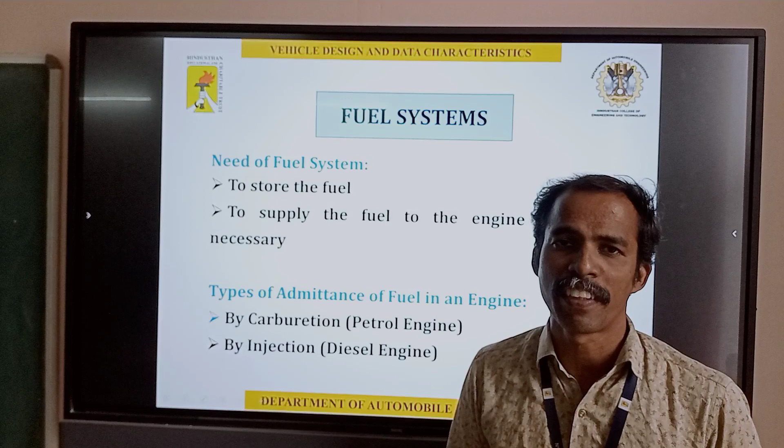The fuel system is used to supply fuel to the engine in the correct manner, at the correct time, with the correct quality. If it fails, overall engine performance will be affected and emission norms will also be affected. So the fuel system must give a correct quantity of fuel at all conditions, because we run the engine under various conditions - accelerating, decelerating, braking, and halting at a traffic signal. In these various conditions, the fuel system should supply fuel to the engine with the required quantity and quality.

So, types of fuel system - we admit fuel inside the engine by two processes. In case of SI engine, the carburetor is used to mix air and fuel and supply the same to the engine. But in case of CI engine, we inject the fuel at high injection pressure.

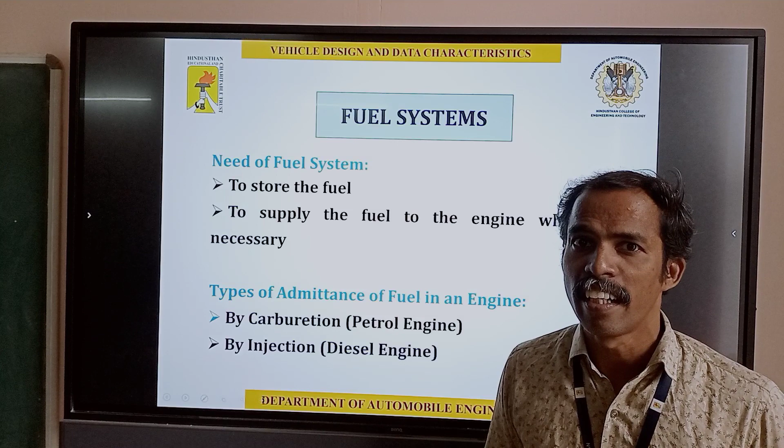Next is the fuel pump, present in both SI and CI engines. The purpose of the fuel pump is to send fuel to other devices like the carburetor or the injection pump with a minimum amount of fuel pressure, since fuel is set with a higher injection pressure. The pump pressurizes the minimum amount needed to move fuel from a lower level to a higher level, such as to the carburetor or for fuel injection.

The carburetor is a device used to mix both air and fuel in various quantities. The exact quantity is called the stoichiometric ratio - that is, 14.7 kg of air is needed to mix with the fuel to burn exactly, without emission, for clean combustion. So the carburetor mixes the air and fuel well and sends it to the engine.

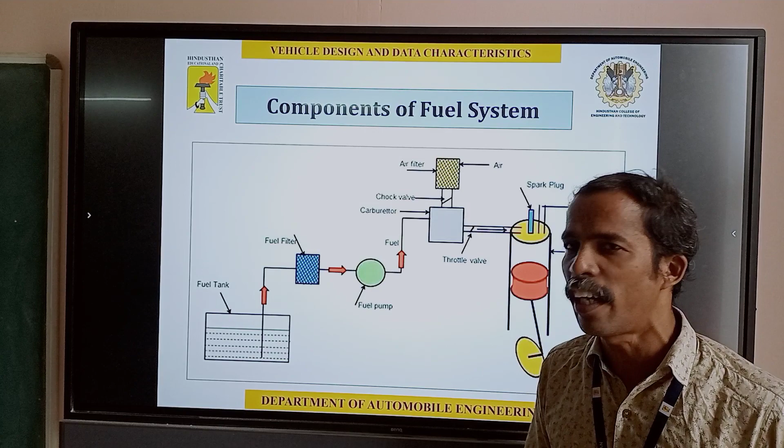Similarly, just as we have a fuel filter, we also have an air filter. The air filter filters the air and sends clean air to the carburetor. Then, finally, the engine burns the air-fuel mixture and develops power.

We have three kinds of mixture proportions. The first is the chemically correct ratio, or stoichiometric ratio - meaning the entire quantity of fuel should be burned without any balance, giving high power output. This ratio means 14.7 kg of air is needed to burn 1 kg of fuel completely, giving clean emission. This is called the stoichiometric ratio.

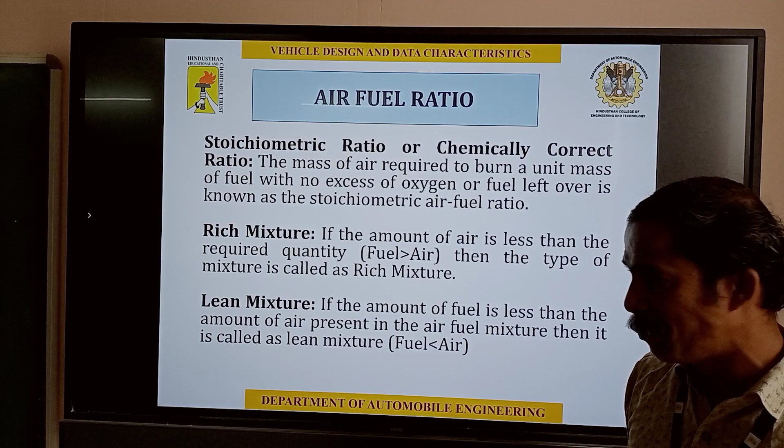The next one is the rich mixture. If the required fuel quantity is more than the stoichiometric amount, the mixture is called a rich mixture. The last one is the lean mixture - if the quantity of fuel present in the air-fuel mixture is less than required, the mixture is called a lean mixture.

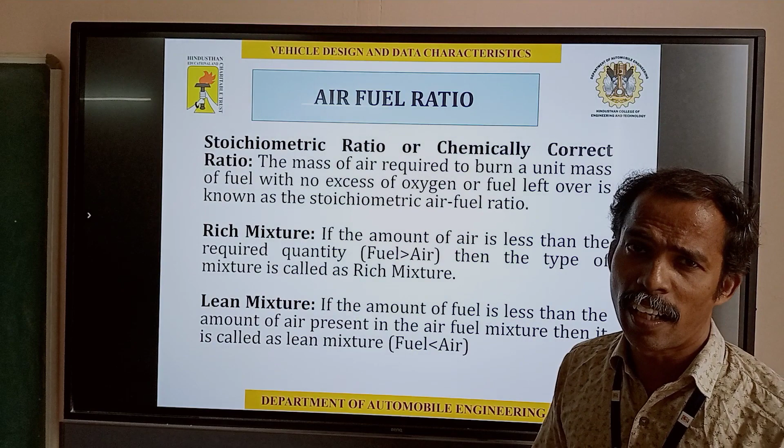For a rich mixture, the fuel amount is more, so higher output is possible, but at the end of emission, some fuel may remain as unburnt gases. In case of a lean mixture, which is used for normal acceleration to give normal power output, the emission may contain oxygen, but at the same time, the entire fuel present in the air-fuel mixture will be completely burned.

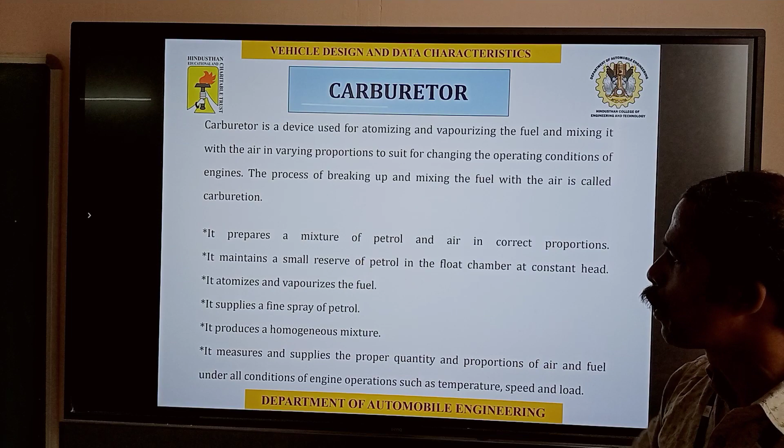These are the purposes of the carburetor, which we have already seen. The carburetor is used to supply air-fuel mixture with respect to cylinder requisition. It prepares the air-fuel mixture, atomizes and vaporizes the fuel, supplies a fine spray of fuel, and produces a homogeneous mixture - meaning air and fuel are thoroughly mixed well.

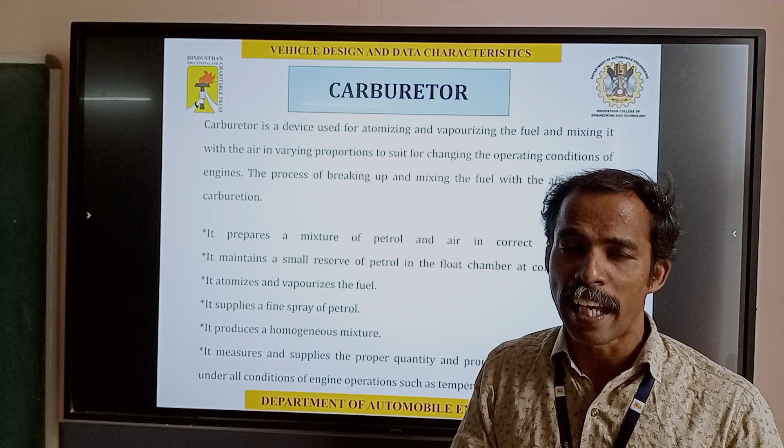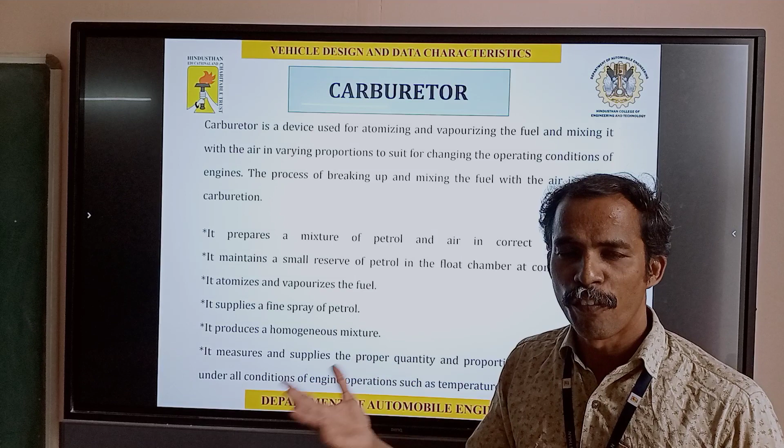In a CI engine, the mixture is called a heterogeneous mixture, because in the entire pool of air present in the CI engine's combustion chamber, fuel is sprayed at particular places - some places have more fuel, some have minimum fuel. So that mixture is called heterogeneous. These are the purposes of having a carburetor as a device.

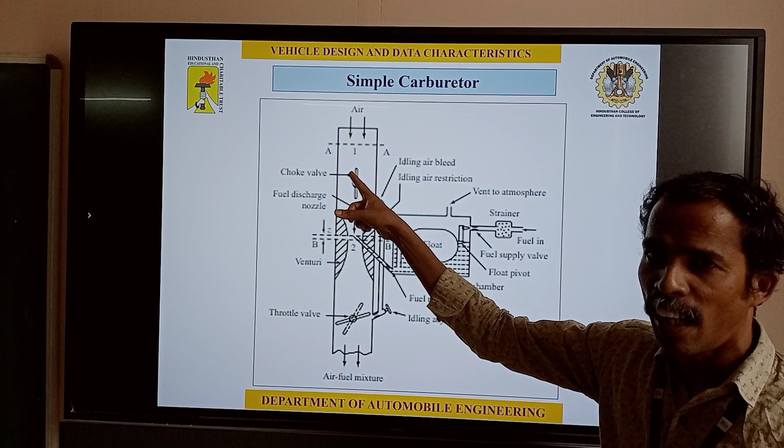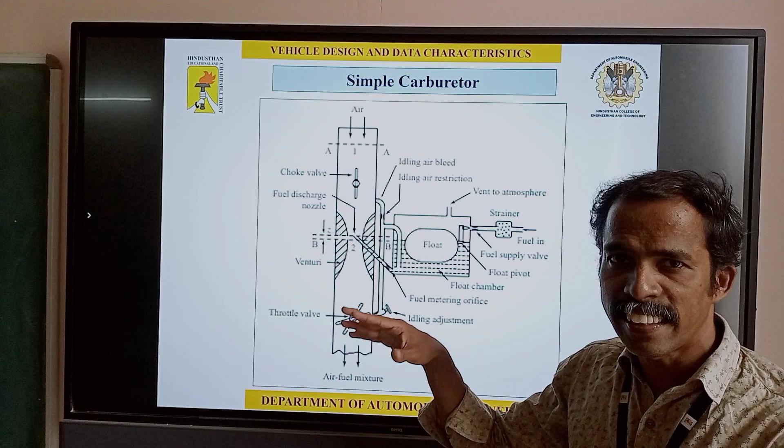This figure shows a simple carburetor used in a vehicle. The upper portion is called the choke, and the lower portion is called the throttle valve. The throttle valve is connected to the accelerator, so when we accelerate the vehicle, the throttle valve opens and connects the entire engine vacuum to the carburetor, allowing it to suck in the maximum amount of air.

Choke valve we are using for the purpose of starting. We are not admitting the air to go into the carburetor at the time of starting the engine. Once the engine is started, the suction created by the engine automatically opens the choke valve and more amount of air can pass through the carburetor.

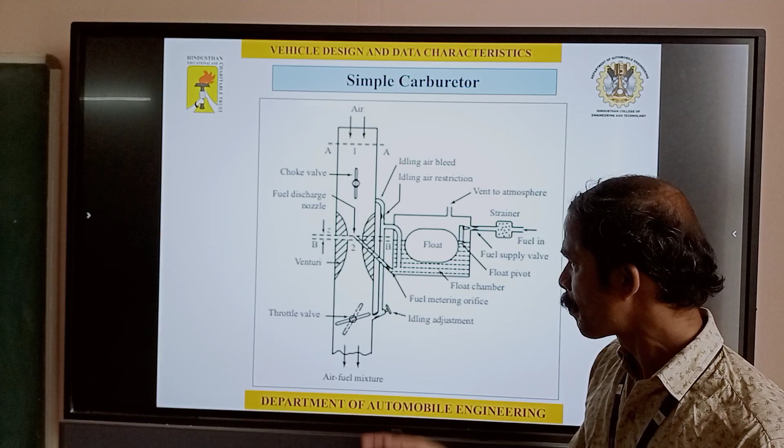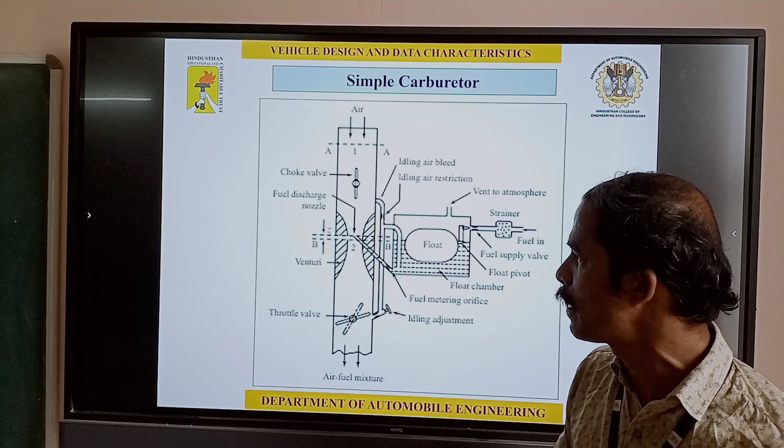This is the main portion of the carburetor, which is called venturi. The venturi has the minimum cross section of a carburetor. The jet is also placed at the venturi to have maximum velocity difference between the choke and the venturi. Greater velocity and pressure difference here cause the fuel to flow from the fuel float chamber to the jet.

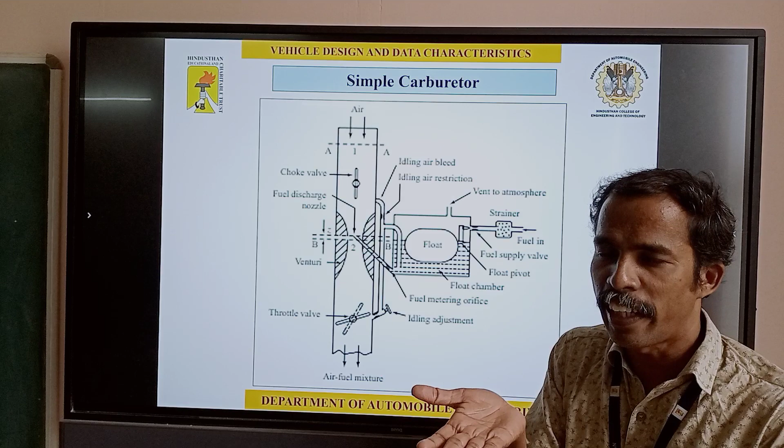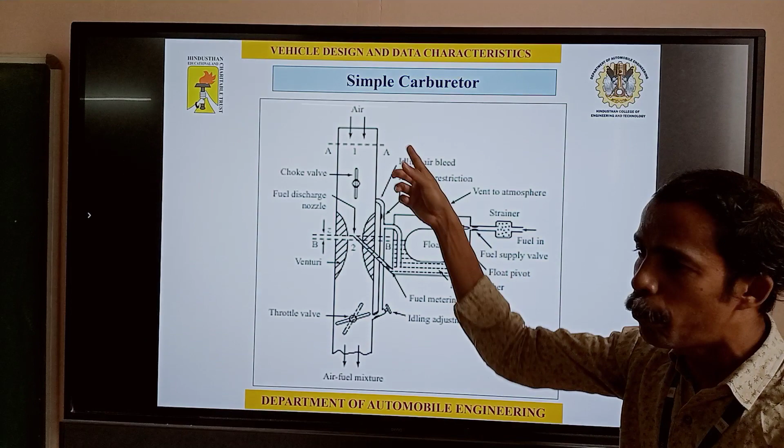Here, an additional system is called the float chamber. The fuel comes from the fuel tank to the float chamber first. The float sits on the fuel. Once the fuel is filled inside the float chamber, it automatically closes the passage between the float chamber and the fuel tank.

So the simple carburetor has the floating system, main system, and idling system. This simple carburetor is not enough to supply the air-fuel amount to the engine at all the various conditions, so we needed to build some other additional devices inside the carburetor.

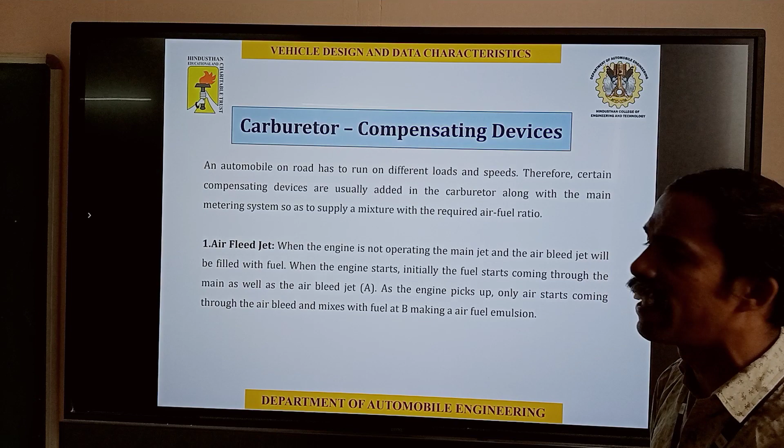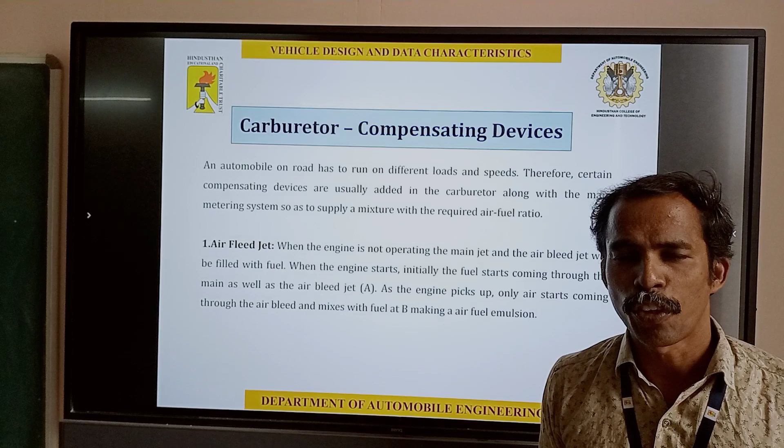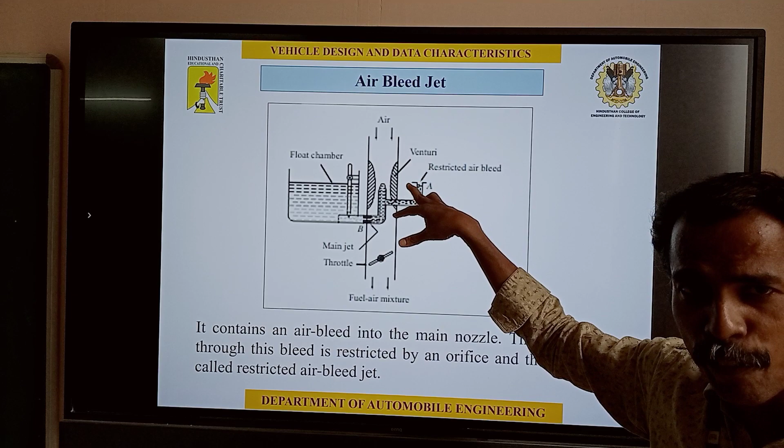The first one is the air bleed jet. Air bleed jet means when the engine is not operating in a correct manner, the air bleed jet is additionally used with the main jet, which supports the engine to run in a smoother manner. The air bleed jet additionally sucks the air or fuel inside the engine whenever necessary.

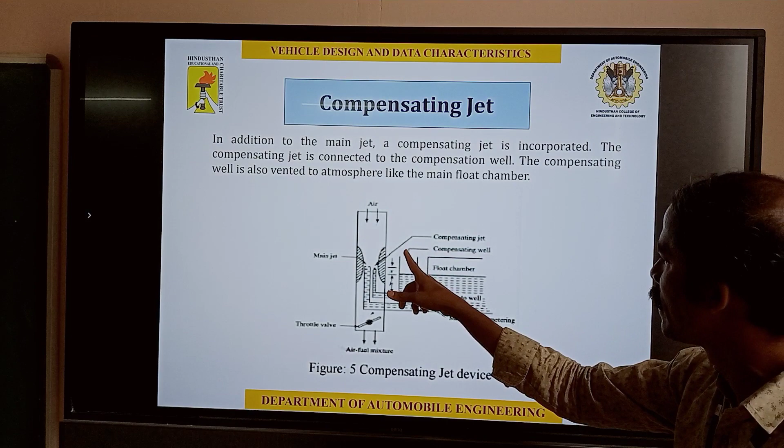This is the compensating jet device. The compensating jet device is used to send more amount of fuel inside the engine. There is an additional jet called the compensating jet, because a single jet may give only a minimum amount of fuel, so we need that one.

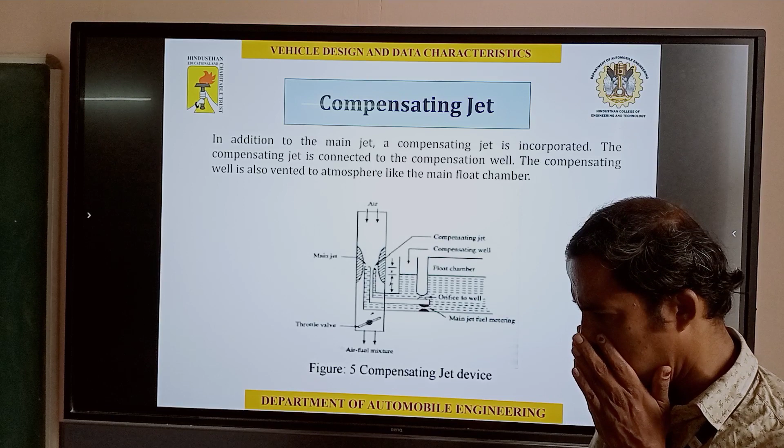Acceleration pump: if we accelerate, the engine needs to generate maximum power, so we are using the acceleration pump system. At the time of acceleration, the accelerator pump is connected with the carburetor, which pushes the fuel to flow maximum to the carburetor.

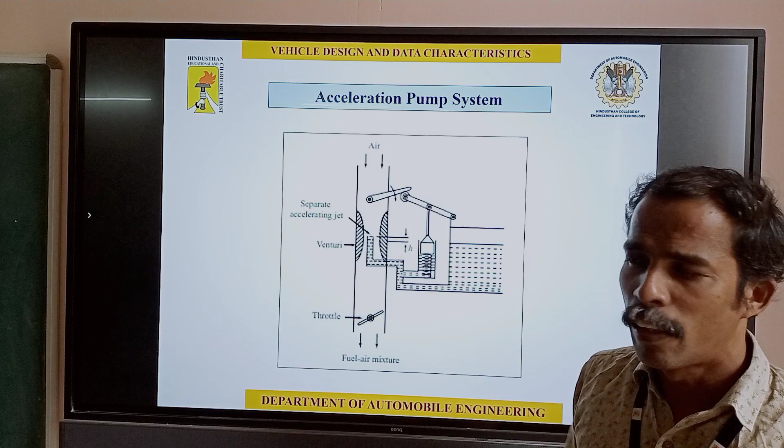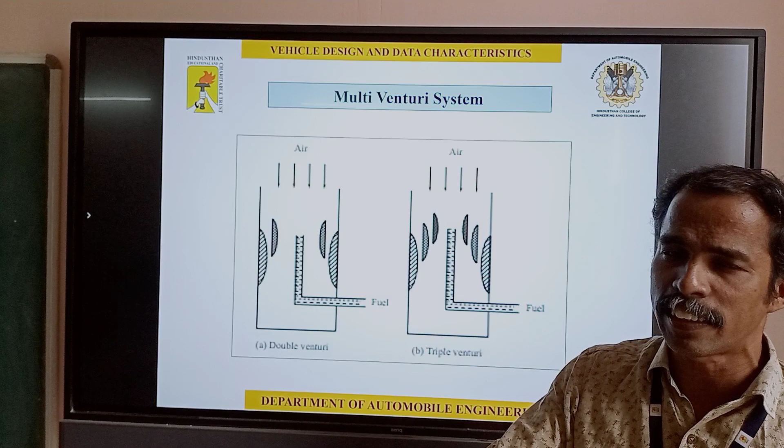Multi-venturi system: because a single venturi can produce only some amount of pressure difference, if we use a multi-venturi, then we can get maximum amount of pressure difference as well as maximum amount of fuel quantity to the engine.

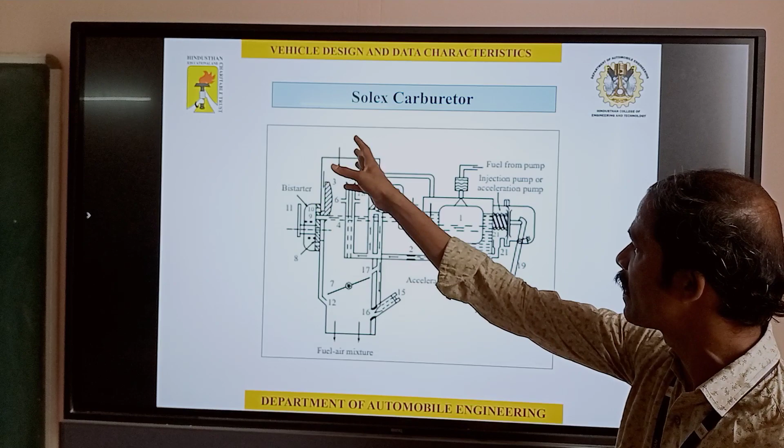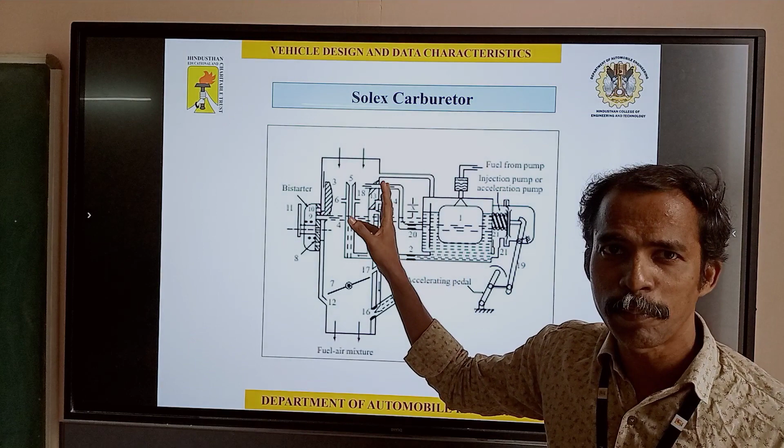This diagram will be very complicated, because you can see lots of systems are involved in a carburetor. These systems are used in heavy vehicles. This carburetor is called a Solex carburetor. Even a highly skilled technician will feel it very difficult to dismantle and assemble this carburetor, because it has multiple systems: air bleeding jet, multi jet, compensating devices, acceleration pump, idling circuit, starting circuit, and maximum power giving jet.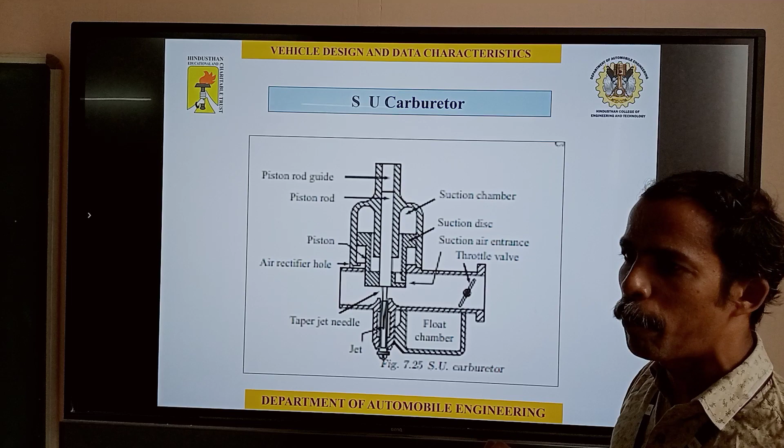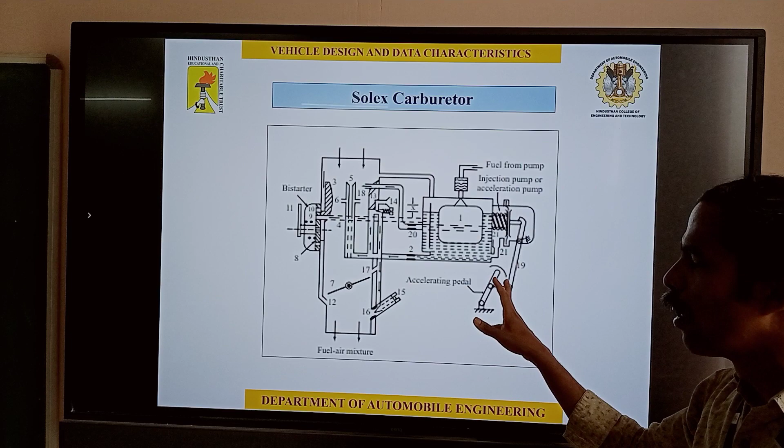Here the venturi is in this portion. It has a taper needle and this is the throttle valve. We have the choke valve here. Air passes from this place through the throttle valve to the engine. By accelerating, what we are doing is pulling this needle upwards, so because of this taper section, the venturi portion is varied depending upon the movement of the acceleration.

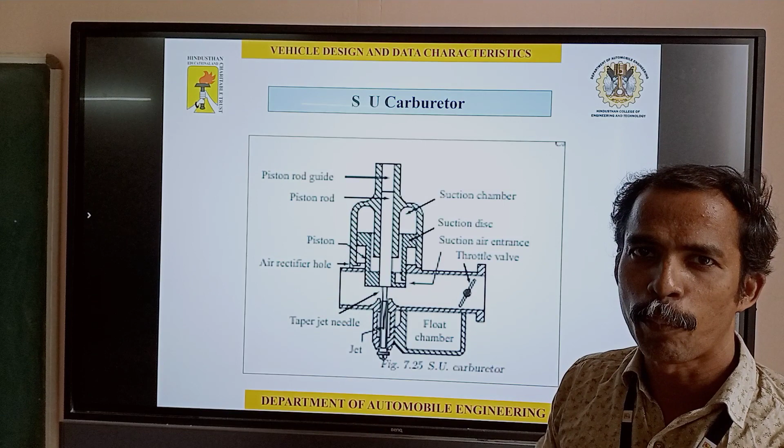The SU carburetor is a smaller device which can be used in two-wheelers. It cannot provide all the operations which can be done by a multi-jet carburetor like the Solex carburetor. It has a minimum number of operations like starting system, main system, idling system, floating system, etc.

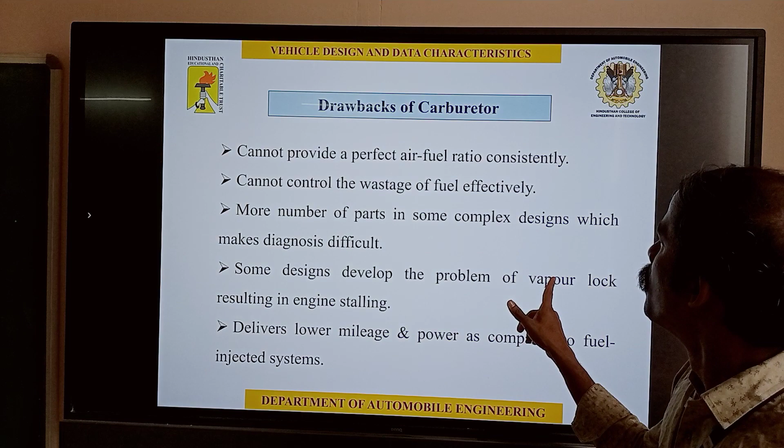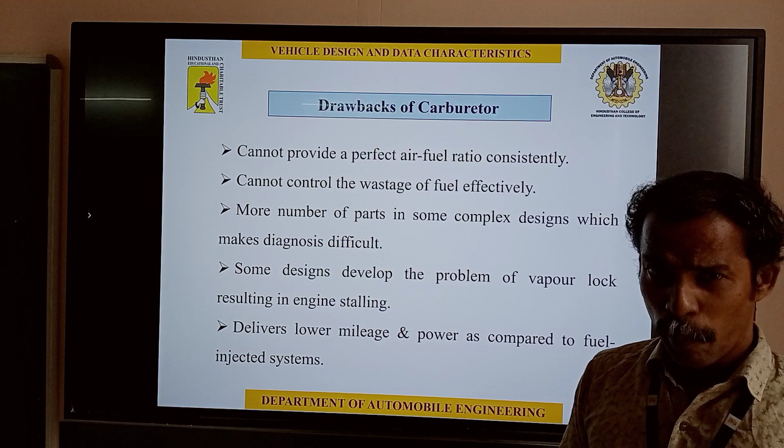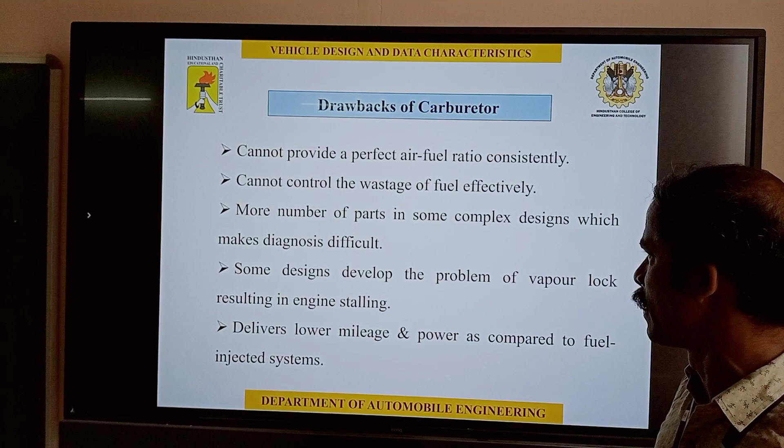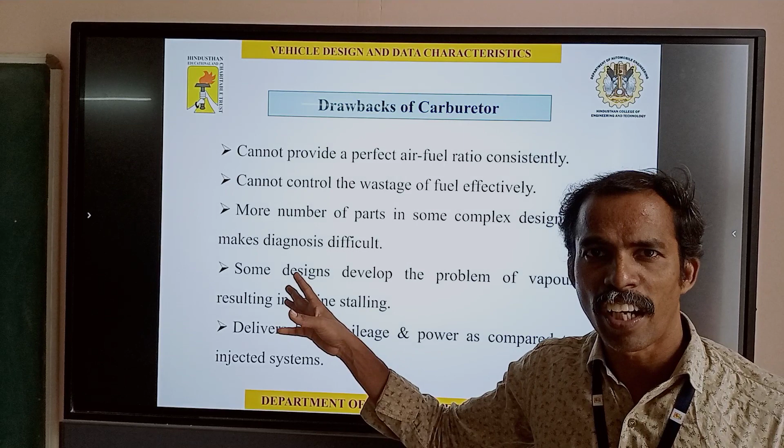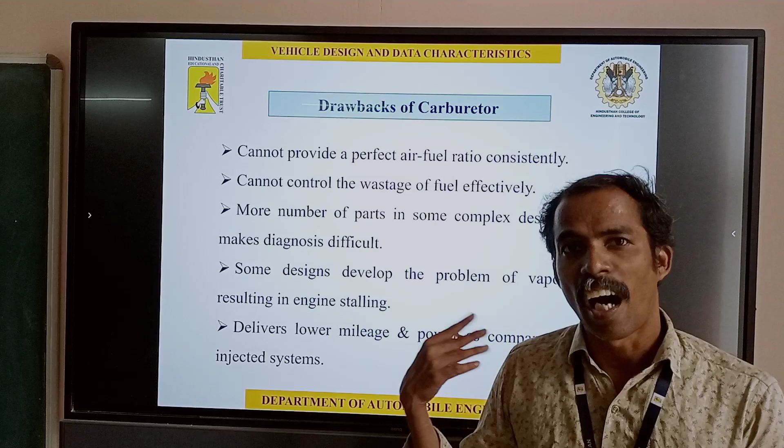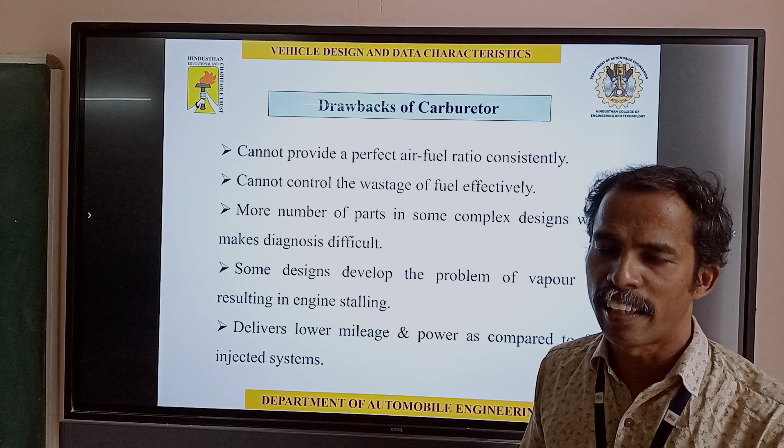Because of these drawbacks, we are moving to some other advanced fuel system, that is the fuel injection system. By applying fuel injection system, we can improve fuel economy, reduce emission, and improve power output. Automatically the engine performance will also improve, and engine life will also be more. So we are moving from the conventional system to the injection system.

So in this way we are using petrol injection, that is electronic fuel injection. The petrol injection is of two types: single point fuel injection and multi point fuel injection, which is the latest technology and converts all the problems of the carburetor into solutions, where we can get maximum fuel efficiency, maximum power output, and maximum engine life. This is the advanced technology we are using.

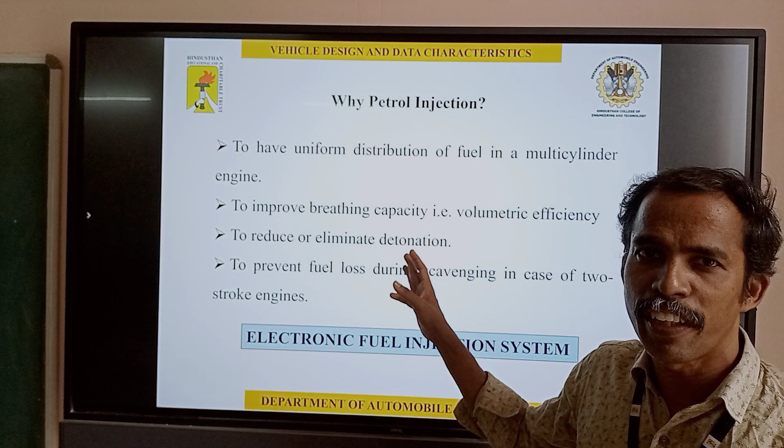So that's all. I hope you have understood well the fuel system of automobile in this video. Okay, thank you.